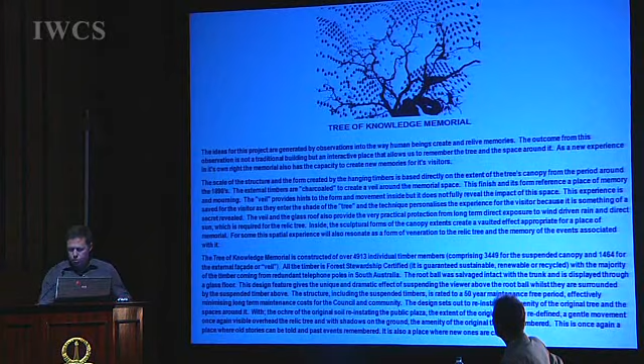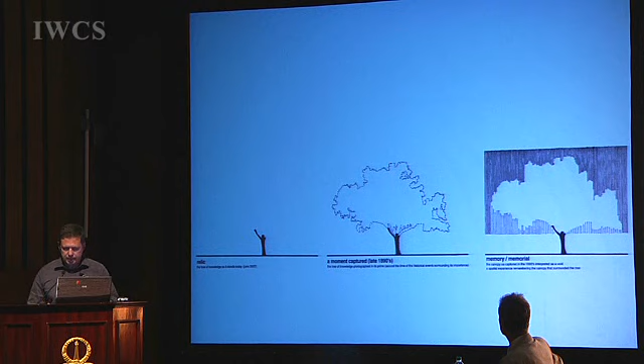So as you can see, this little diagram is literally explaining the ideas behind it. So what we were left with after the tree was poisoned was the relic itself. And then we've got some photos from the late 1890s when the tree was in its full maturity, and we were able to extrapolate from photographs a volume of that tree. And then we had the memorial itself created by a negative void around the relic itself. So that gives you a general background in terms of a design philosophy.

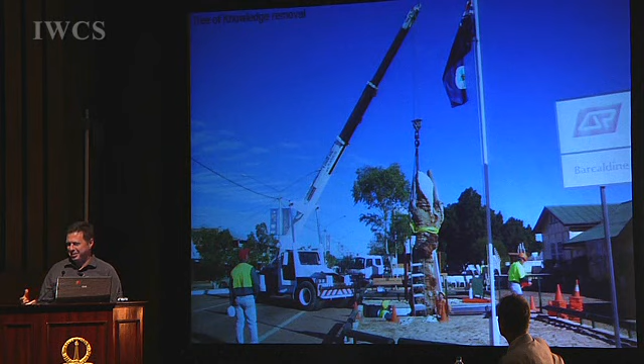So this is just really some photos of when we actually removed the tree. And quite a funny anecdote of this story is I had the client ring me up one day and said, oh Brian, we're going to cut the tree down this afternoon. And I said, hang on, what about the root ball? The root ball is symbolic of the tree's initial birth. And so they said, oh, there's no root ball there. And I said, well, can you get a couple of guys to go down there? And anyway, they started digging and digging, and this root ball was actually quite massive.

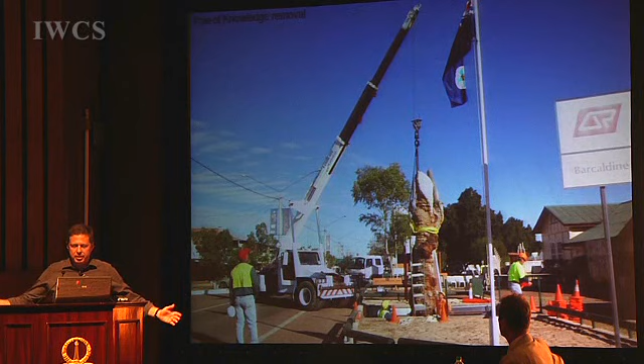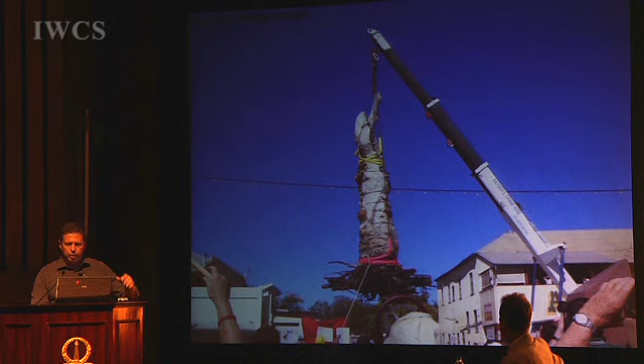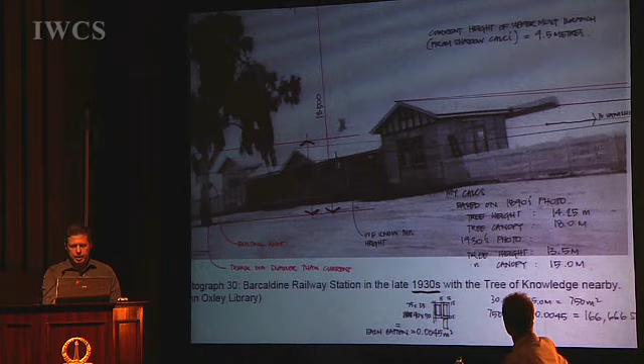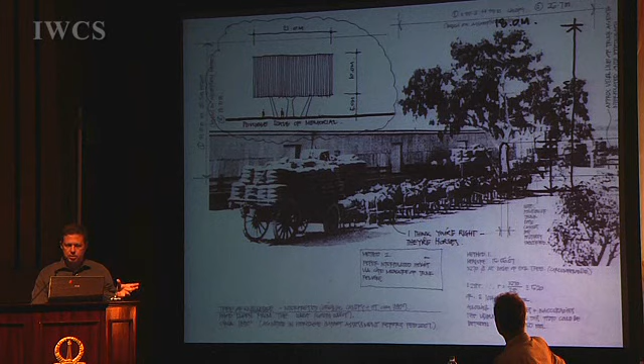So as you can see, we're actually able to generate, I don't know, the slide's a bit big, but we're able to actually generate the scale of the tree and try and form some volumetric process in terms of generating a three-dimensional form. So these are some initial ideas in terms of what we thought the canopy was in terms of its scale and size. So that generated the form of the memorial itself.

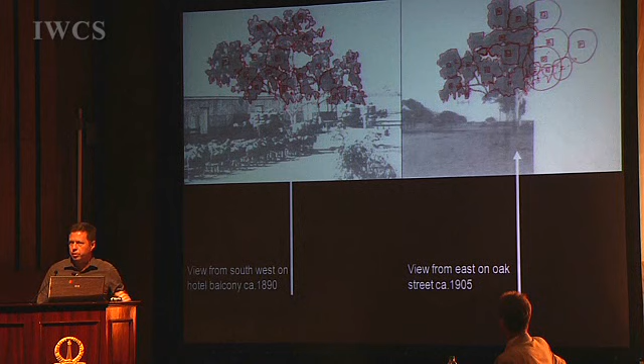And here we are, we're actually clumping each of these. The tree is actually an old ghost gum tree. I don't know whether anyone knows Australian eucalypts, but a big old beautiful ghost gum. So from this diagram we were able to generate both plan and sectional ideas. So this gives us an idea how we actually generated that 3D volume over the top of the memorial.

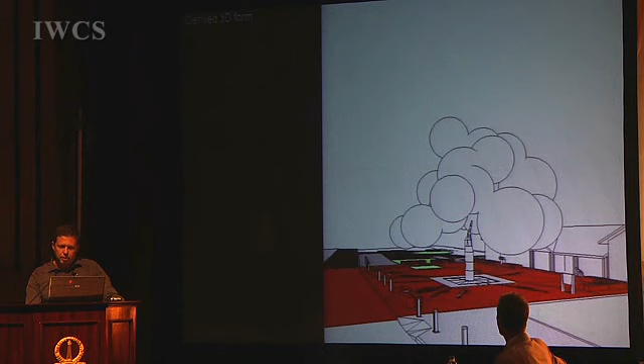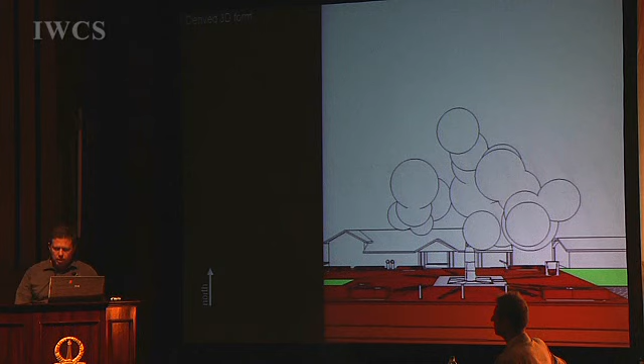Just quickly. And then there was a great conundrum with this project: how do you actually cover a tree? How do you put something over the top of the tree? So the idea of creating this negative void, which is the original canopy, came to us. So what we did was we actually suspended timbers from a structure, and that created that original canopy.

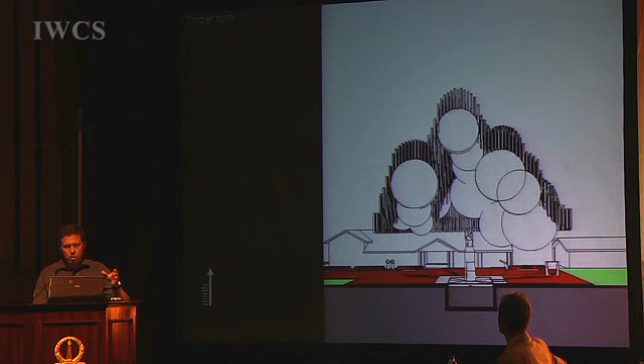So even though there was only the relic of the stump left with some regrowth branches, we were able to create the feeling of the tree by suspending 3,500 timbers. So the actual volume of the structure is 18 metres cubed, so it is actually quite sizable. So as you can see, this is how we generated the form of being underneath this structure.

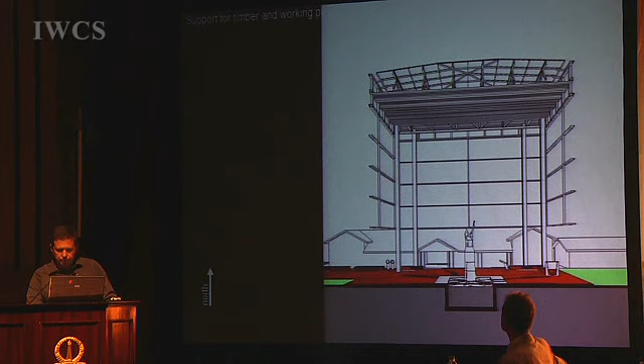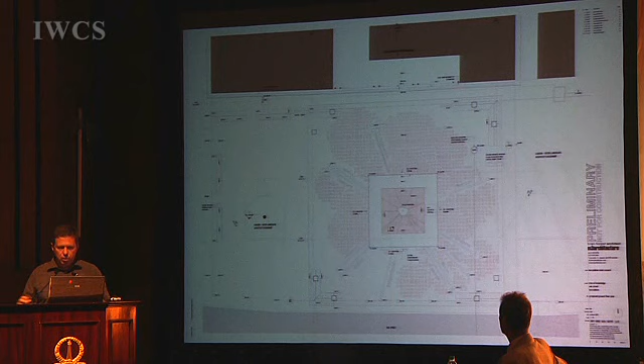And of course, it's not a static structure. The timbers do sway, and I've got a little movie which I'll show quickly to you afterwards. So this is just our early three-dimensional imagery that we generated. The plan form itself: the heritage report called for a decluttering of the site. Over time they'd built a lot of stuff near it, and so we literally tried to clear everything out of the way. They're just some elevational ideas.

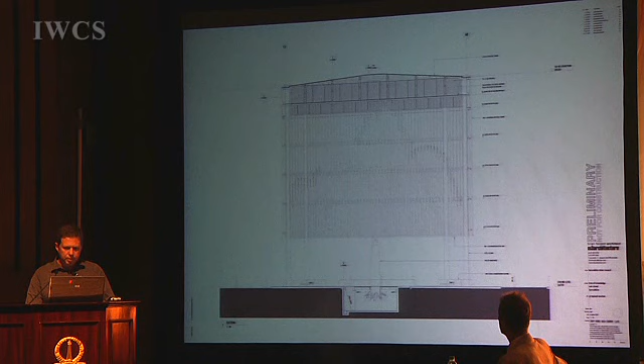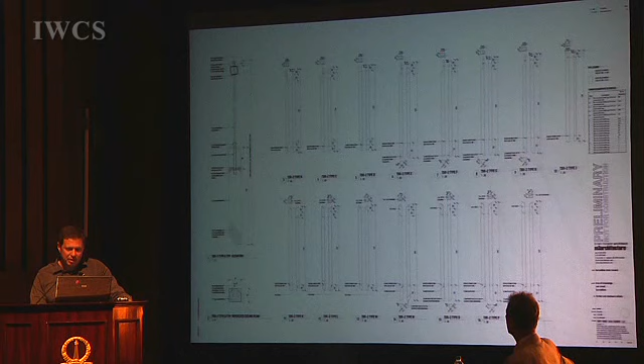So these are some cutting diagrams of the external timbers, and I don't know whether you can see there, but that's how we suspended the timber from the overhead structure. The other idea is we've got a glass roof on the memorial, so you get this dappled light coming through the timbers, and because these timbers sway, you get this lovely sensation of actually being under a tree.

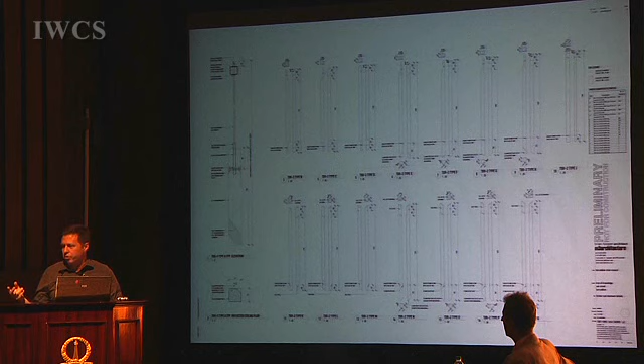And because the structure is so great in terms of the trusses, we clad the trusses in a mirrored stainless steel, so you don't read any of that structure as you look up through it, and so it has quite a lightweight element to it. So I'll just quickly take you through the photos. So this was a salvage. We salvaged the root ball and built a glass floor over it, so people can look down.

Another funny story was when we were digging the tree out. The council workers found this little box of ashes with a plaque on it, and it had a gentleman's name, a true believer, a very staunch Labor Party member, and his wife had snuck in there one night 15 years earlier and buried his ashes there. So we replaced the plaque by the root ball, and she was a guest at the opening of the memorial.

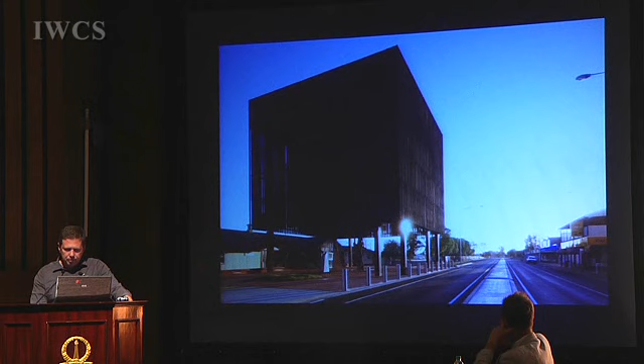So this is it in its context in terms of that streetscape that we were talking about. So from the outside, I'll just quickly read in terms of the actual structure. We actually charcoaled the timber on the outside, and there was this symbolic gesture in terms of creating a veil where it didn't give away too much of the memorial. So from the outside you get to read a little bit of that canopy, but it doesn't fully expose itself until you actually walk in underneath the structure.

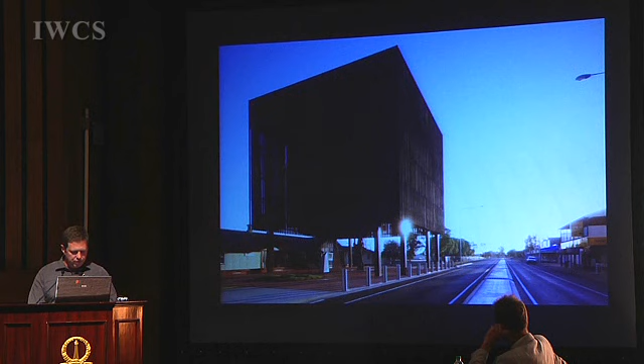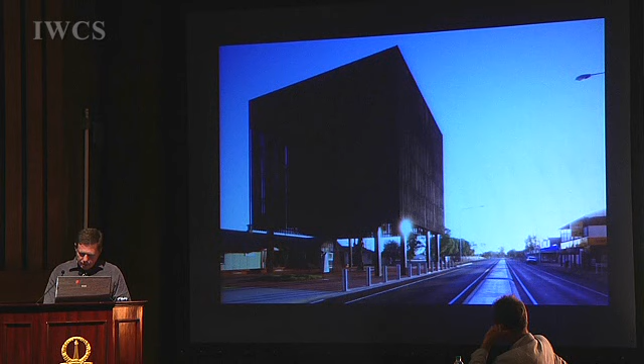So the scale of the structure and the form created by the hanging timbers is based directly on the extent of the tree's canopy. The external timbers are charcoaled to create a veil around the memorial space. This finish and its form reference a place of memory and mourning. The veil provides hints to the form and movement inside, but it does not fully reveal the impact of this space. This experience is saved for the visitor as they enter the shade of the tree, and the technique personalises the experience for the visitor because it is something of a secret revealed.

The veil and the glass roof also provide the very practical protection from long-term direct exposure to wind-driven rain and sun, which is required for the relic tree. Inside, the sculptural forms of the canopy create a vaulted effect appropriate for a place of memorial. For some, this spatial experience will also resonate as a form of veneration to the relic tree and the memory of the events associated with it. The Tree of Knowledge Memorial is constructed of over 4,913 individual timber members, comprising 3,413 for the suspended canopy and 1,500 for the external facade or veil.